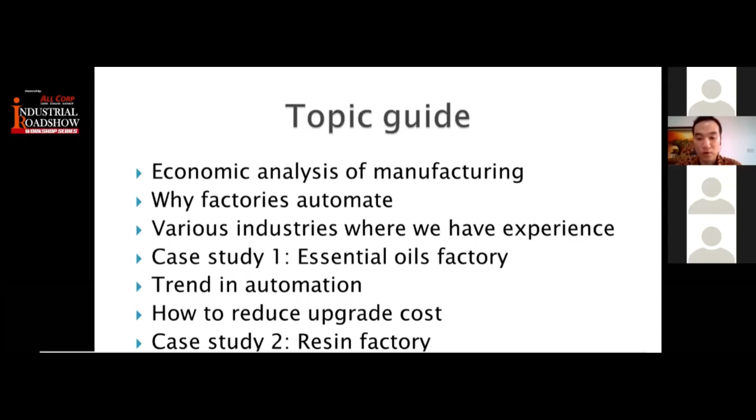As business owners, the main thing you actually want in the end is the net profit, right? It's a factor of three things: revenue, expenses, and finally the cost of production, which is COGS, cost of goods sold. The first part, revenue, is to do with how to sell more, so that's branding, product, and things like that. The second part is expenses, things such as electricity, rent, and other costs. And then finally is cost of goods sold, which is how much it costs to make your finished product.

That's a component of three things: labor cost, and cost of waste product—usually products that you already made but fail the QC, quality control process, so you cannot sell to the customer, and it becomes waste. The third component is productivity: how much your factory can make in one day or one shift. Now, these three things are usually the main reasons why a lot of factories automate, and this is the core of what we are trying to improve with our service.

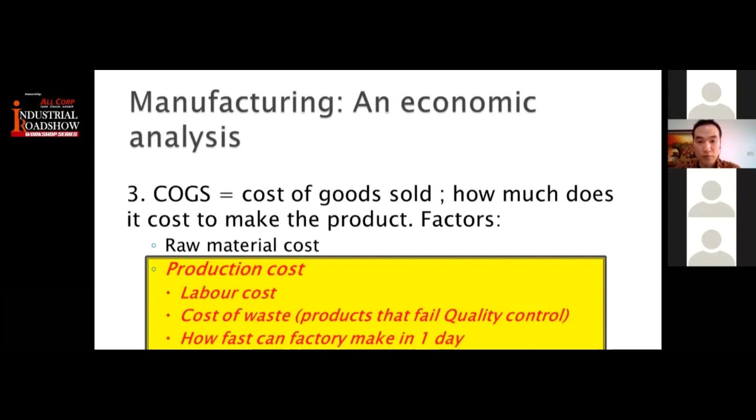So why do so many factories automate? You will see in developed economies there's usually more automation. In developing countries such as Indonesia and maybe Myanmar, the level of automation is less. But the reason why eventually most places automate is because, number one, your labor costs usually become more expensive over time. In Indonesia, labor costs each year usually go up 5, 10, 15% every year.

You still have to take into account things like health insurance and other costs. These things will make your production cost increase compared to automation, where it's usually initial capital expenditure, but after that it's very low maintenance and definitely does not go up in price every year. So the main reason companies automate is to reduce the labor costs required for manufacturing. Number two, which is less known, is you usually get improved product quality.

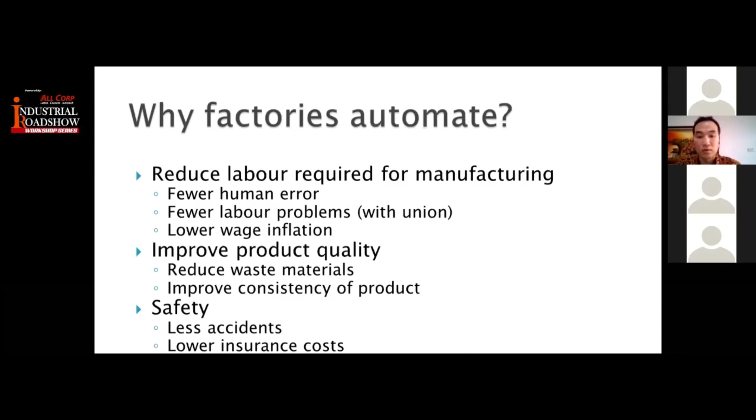The final reason is usually safety. We have had many customers who experienced accidents—sometimes a factory fire because a process went bad. Sometimes there are situations where the process wasn't monitored enough, or the local operator was distracted and did not monitor properly. This is a factor that can potentially cost a lot of money. So in summary, lower cost of goods sold will mean higher net profit.

Now, not all automation is the same. The process that we do is shown in the table on the left—we call it process automation, things like heating and cooling, batching, other industrial processes, mixing, and so on, compared to task automation. The main difference is that with the table on the right, you can already buy a complete machine, like a bottling machine or maybe a noodle maker.

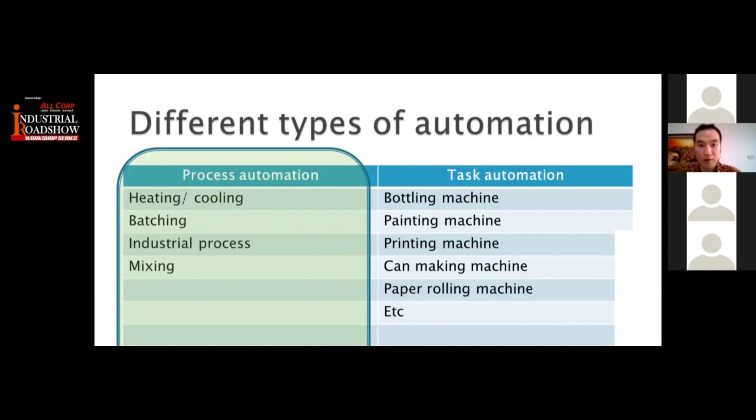You just put in the raw material and it comes out as the finished product—like a printing machine. These kinds of machines, we do not do; they are not our expertise. What we do is mostly a whole factory automation, and then we provide parts and components of that system. Now, can my factory become automatic?

Almost always the answer is yes, other than factories where you need special human skills, such as maybe a cup factory where you need to make the cup by hand, a handmade cup factory, or things like that. But most factories can, and most factories can always go to some percent of being automated.

Some of the main actions that can go automated are things like opening, closing valves, turning on or off pumps, agitators, blowers, or boiler machines, reading all sensors on the field - temperature, pressure, flow, level - things like that, as well as batching.

So batching is, I want to create 1,000 liters of product. That is called batching. It's very hard to do with manual labor, and it takes a lot longer per process.

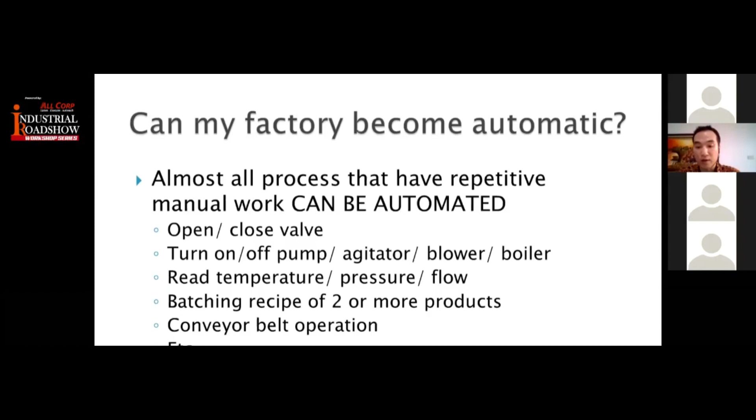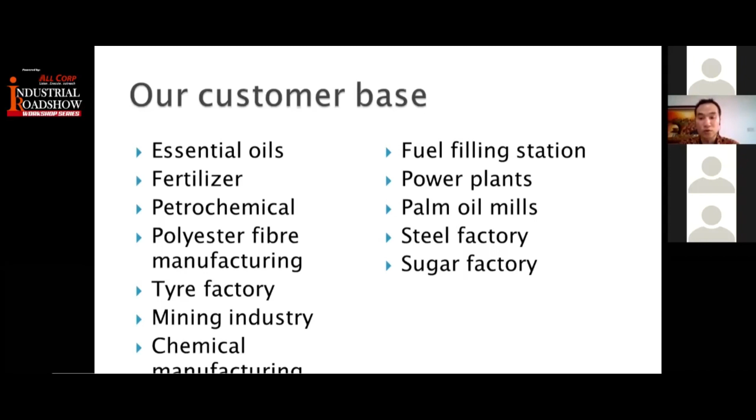Now, some of the factories that we have had experience in - if your factory is in some of these in this list, then you know that this is the trend worldwide. Things like essential oil, fertilizer, petrochemical, polyester fiber manufacturing, tires, mining industry, chemical. Chemical is a big one. I don't know what the industry of chemical is in Myanmar. Fuel filling stations, power plants, palm oil mills, steel and sugar factories. So if you have a factory along these industries, then you know for sure a lot of the process can be automated.

Okay, so we go to our first case study. We recently did this, probably about 1 year ago.

It's an essential oil factory. Essential oil is like getting usually the smell of a product, for example clove or cinnamon or coffee or vanilla, things like that. So they get the raw material, which is, for example, coffee beans, and then they want to get the chemical that has that smell.

So the key process that they automate is a process called fractional distillation. It's basically heating up the oil until it becomes gas. And then the gas is condensed and then it becomes a pure essential oil from that material.

So previously, we'll go through the process a little bit. The material is inserted into the tank and then mixed with water. In this way, the essential oil will go into the water, and then it is pressurized to a high pressure so that all of the oil from the material goes into the water.

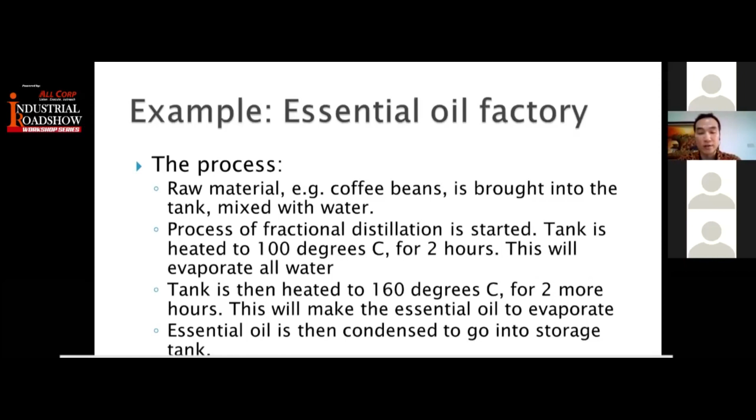So this process is not very complex, but it is high risk because you have high temperature, high pressure, and a lot of components need to be monitored for safety. So in the past, they had field operators manually open and close the steam for the temperature, things like opening, closing valves for the condenser tanks, and also monitoring the pressure and venting valves. So there's a lot of manpower involved.

So when we look at the study of the before and after, the initial headcount for their operation totaled 14 people. You have 7 operators for the production, the fractional distillation component, and then an extra 7 people for the utilities - the wastewater treatment plant, the boiler, as well as production manager and QC. So this is just on the plant floor.

So there's 14 people. Now, after the automation, what you get is a total of 6 people, because all those people who were opening and closing valves, monitoring pressure, monitoring temperature, can now just sit in the control room looking at the computer screen, and everything is controlled from the computer screen. So there's just 2 people on maintenance on the plant floor, 1 person in the control room, and then the rest is the same.

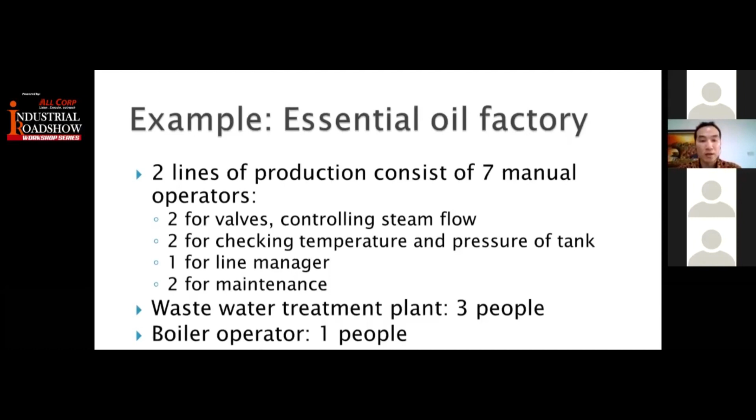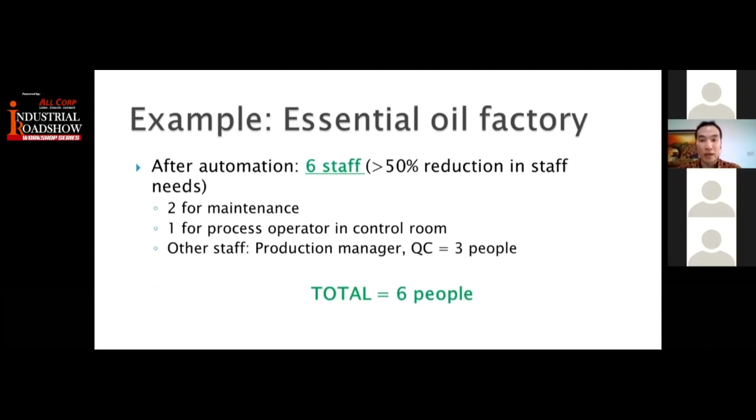So the production manager and QC is still the same. If you look at the previous slide, on the last line, production manager and QC is still 3 people. So that's not changed. But all the people doing the process on the floor is essentially reduced to 2 for maintenance and 1 for control room. So that's more than 50% reduction in labor staff requirement, right?

Now, some of the benefits this upgrade has brought to this factory. The first part is that you get production increase. How did this happen? Firstly, because the temperature is monitored instantly and then all controlled from one site, you can achieve the temperature a lot quicker. Maybe before it took them 1 hour to reach 100 degrees. Now they can get that in 30 minutes, right? And then you also can monitor the process a lot better. The end result is you get a lot more product from the same equipment.

Secondly, waste material is reduced by 20%. What happens with this waste material? In the past, because the process took a lot longer, you needed more diesel, more water, things like this. All of that is reduced because of automation.

Number three is better consistency in finished product. Previously you'd get bad product if the temperature was too high. In that case, the essential oil would be a little bit damaged because the temperature is too high. This means they had to throw away some products because it's too hot, and then the essential oil becomes bad.

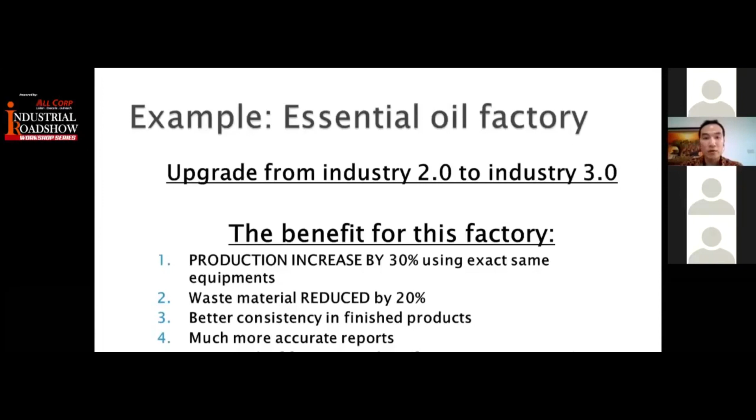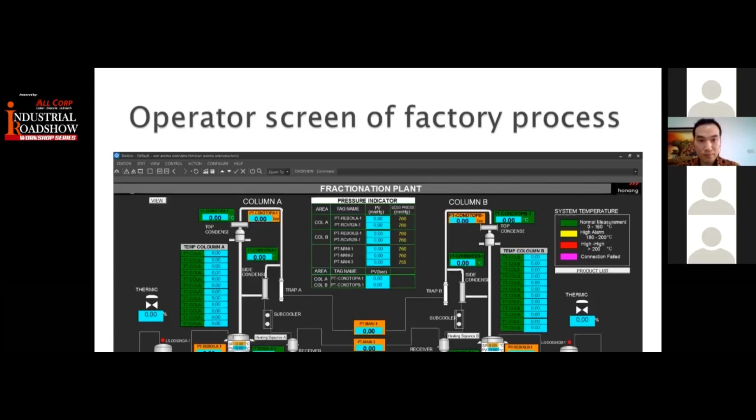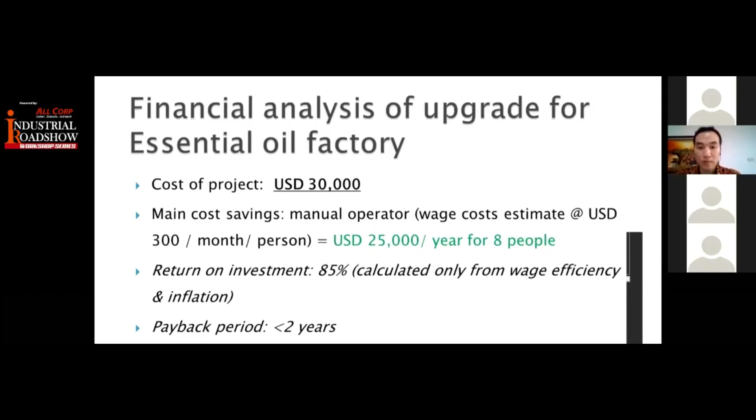So basically, with control system projects and automation, it's very flexible, meaning that you can start small and then add on to the project. That way you get a better return on investment every time you upgrade.

Now, a quick one on the trend in automation. We all hear a lot about Industry 4.0, but what most people misunderstand is what 4.0 means. Let me go through all the automation versions. Industry 1.0 is probably 250 years ago. Before that, they used to use manual labor like humans and cows. And then Industry 1.0 is an upgrade using steam equipment. After that, Industry 2.0 is using electricity.

Now, in Indonesia, it is now mostly already going into 3.0, where you have process automation. So the key in Industry 3.0 is automation, right? So you have things like control systems, PLC or DCS. These are quite industry-specific terms, right? And there's a lot less labor required. As you can see, you have more than 50% reduction in labor headcount once you apply automation. In some cases, it can be up to 70% reduction in labor requirement.

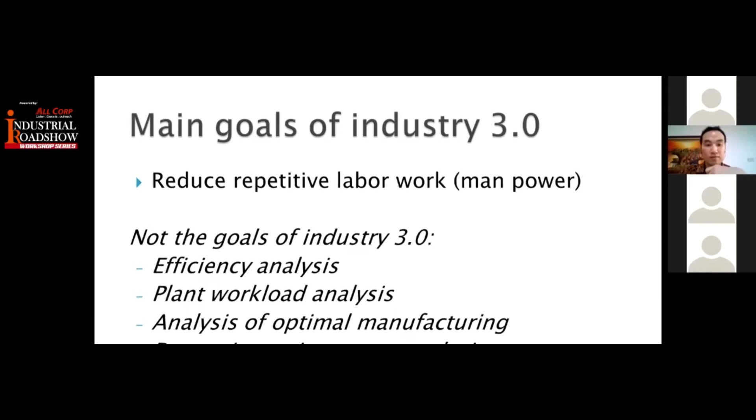So if I go to the next slide, you can see in 4.0 you have all these things like efficiency analysis, plant workload analysis, optimal manufacturing. For example, should I make material A first, or B first, or C first? And then the next one is preventive maintenance. So is my pump or motor almost at breaking point? Should I service it before it breaks down and shuts down my factory?

And then all these other analyses, like waste material analysis, were not possible before automatically. In the past, you would have to make a production report, a main material usage report, and then combine it into other systems like ERP and MES systems. But now in Industry 4.0, you can combine all of this data into the ERP systems in real time, and you get a much better analysis.

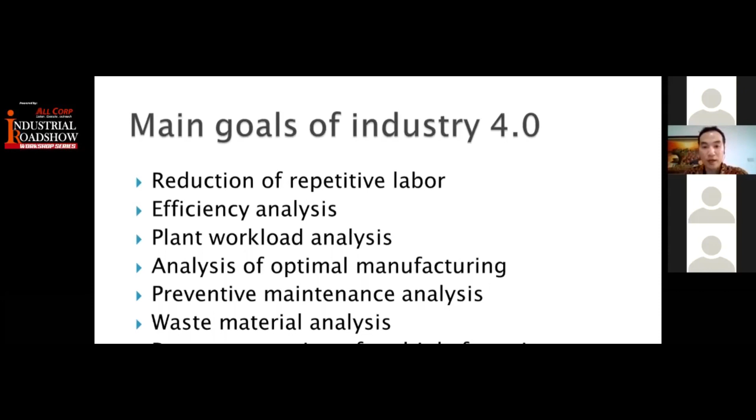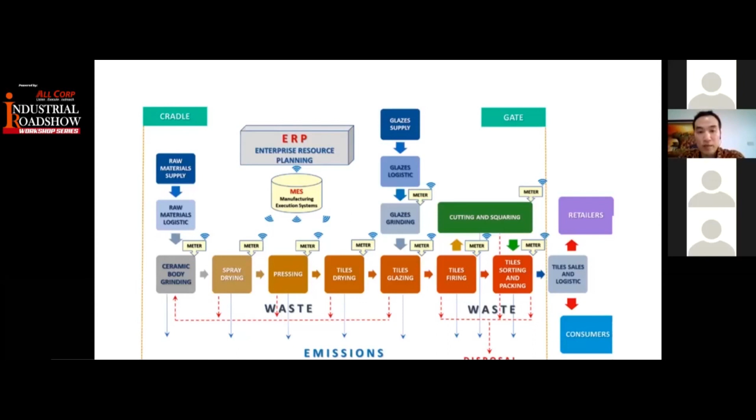Now, if we go to the next slide, I look at the reasons why a factory should or should not go to 4.0. The first point is that companies without ERP systems and MES systems - MES being a manufacturing execution system - if you do not have those systems in place, there isn't really much benefit from going to 4.0. It'd be good enough to just stay in 3.0.

Now, the majority of automation costs occur in upgrading from 2.0 to 3.0. The final thing I want to note is that going from 3.0 to 4.0 is very complex, because most integrators like my company only focus on the plant floor. But in 4.0, you need integrators who are very experienced with IT systems like ERP systems, like SAP for example. Most integrators who do automation do not have this expertise.

So if you're going from 3.0 to 4.0, you must know that it's a whole new level of integrator experience. A lot of projects have failed in Indonesia because the integrators are not yet experienced in these two different worlds. Most of the time, we do not need to know IT systems as an automation provider, but in 4.0 you really need to know IT systems, especially when working with third-party software like SAP or Oracle. This is not something that we or other integrators in the industry have had. So you must be careful when going to 4.0, because it's a whole new level of complexity.

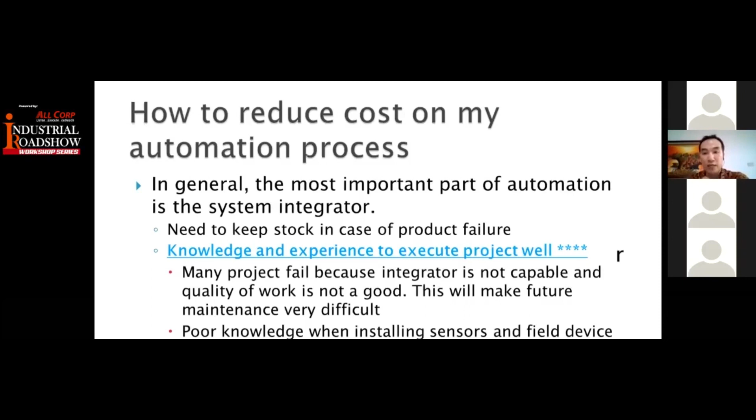That's the main thing, because as you know, when building a house, you can have really good materials, but if the person installing it is not competent, you can end up with a very bad house even though the material is good - the installation is the key part. So you want to find an integrator that has a lot of experience and a good support team, because each project is never good from the first day. It always needs improvement, so the integrator needs to have a good, experienced team.

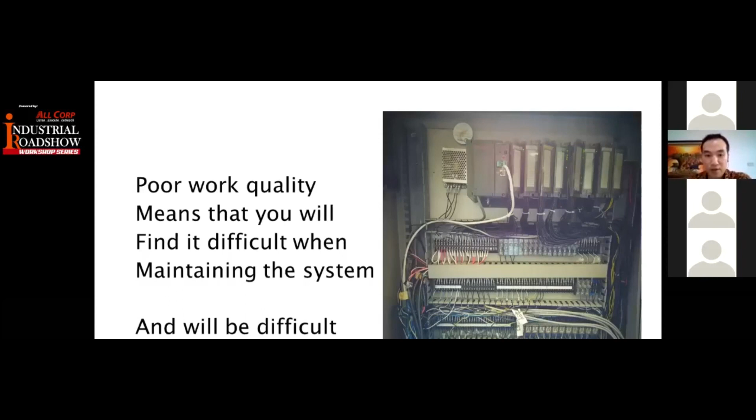Now, here's a photo of badly done work. As you can see, the cabling is not well done. A bad integrator can mean you'll have a very hard time upgrading your system, or if something goes wrong, it'll be very hard to find out where. As you can see here, it's a spaghetti situation - you don't know which one is wrong and where. So this is a bad job.

Now, the second most important part of automation is the control system.

The control system is the brain of the automation factory. The brain is the one that is on all the time and it works all the time. So in most cases, it's usually a PLC, or in a bigger factory, it's a DCS.

You want to go with brands that are reputable with a long track record. So we bring the brand of Honeywell, which is from USA, but usually the most common brands in this field are Japanese or European, mainly Germany, as well as USA. So you want something that has high reliability and it's a proven product.

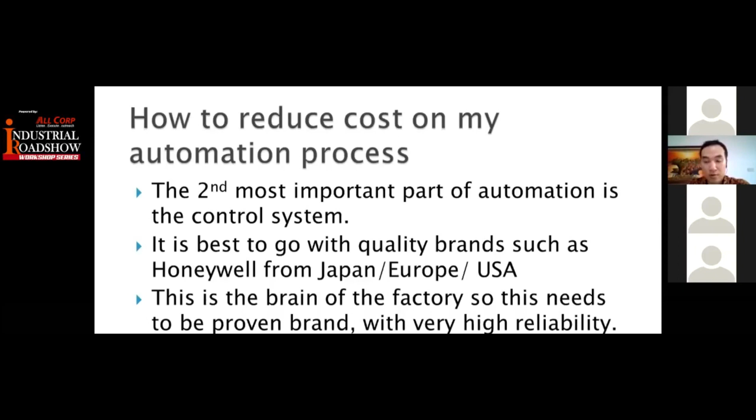Because if this component fails, your factory will not operate. So if it takes one day to fix, you will lose one day of production, and that is a lot of money. The price difference between a cheap brand and a good brand is very small, so it makes no sense to save money on something like that.

Now, the final part of the automation is the field device. So these are things like your pumps, valves, pressure sensor, temperature sensor. Now, this is the part where there are so many choices.

Usually, the best quality products are from USA, Germany, Japan. The middle quality is usually Korea, Taiwan brands. And then the lower price, where you have probably very, very cheap price, but also maybe the quality is not so good, is from China and India.

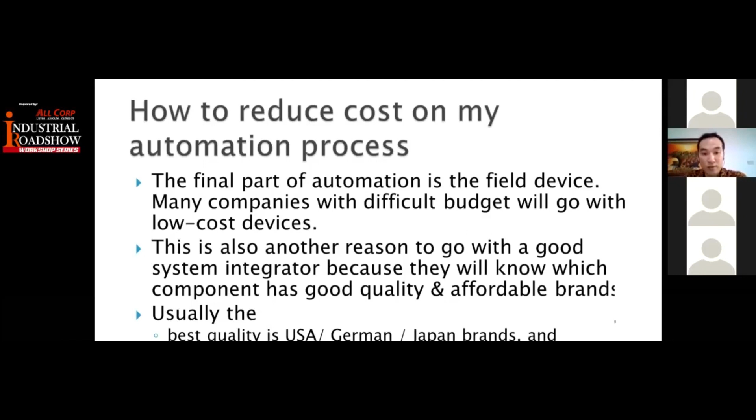So these two countries usually, for factories who are just trying out automation and they don't have a lot of budget, they usually start off with Chinese brand or Indian brand, and then as they see the benefit of automation and they have more cash flow, they will upgrade to the other brands above it.

Now, usually in most cases, this is the part where companies will try to reduce their budget, because even Chinese or Indian brands, they will still work. You may not get a long lifetime, but they will still work, and the accuracy depends on what you buy.

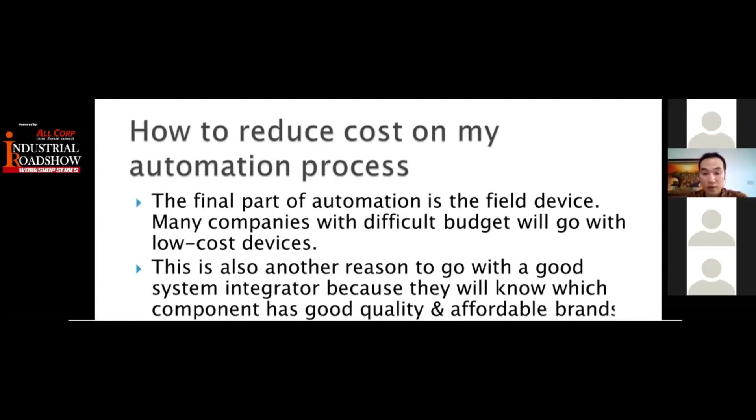Right now, here's the other part that we see a lot of companies use to reduce the capex, the capital expenditure cost of an upgrade. So one of the bigger cost benefits is to skip using a consultant or an EPC company.

We have worked with many companies who try to automate, and instead of hiring a consultant company or an EPC company, they hire an expert as the project leader. This project leader is essentially the person with the design and the knowledge.

Usually this project leader has worked in a factory that is already automated, so you can understand what the other companies have done, and then they will help you make your factory a lot better. This method is a lot cheaper than going with a consultant or an EPC company.

An EPC company is like the main contractor of a factory automation project. As a benefit, you get not only cost savings, but your team will also know your factory automation a lot better because they execute the project themselves. And then you can bring companies like my company to do the actual field products.

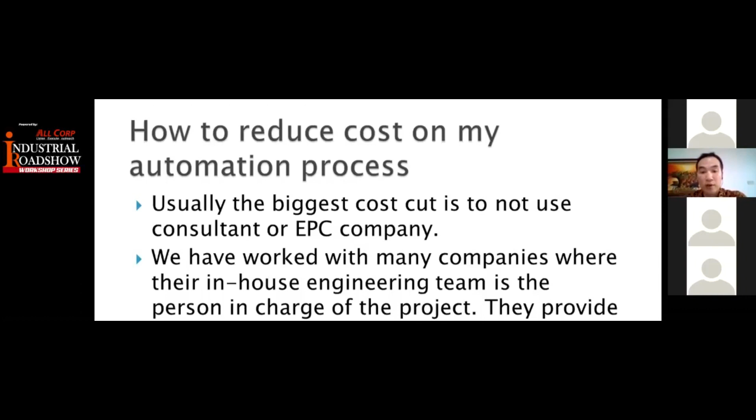Mistakes on these projects - number one is always the system integrator. A lot of system integrators, when you ask them at the beginning, do you know how to do this, they always say yes. But you really want somebody, if you get a reference or case study of what they've done, so you know that they actually know what they are doing.

The second part is usually the equipment that is chosen by the integrator who is not experienced. So things like materials that are not compatible, so you get corrosion or very short lifetime. Things like materials that are not rated for temperature and pressure of your factory, so it breaks down a lot quicker.

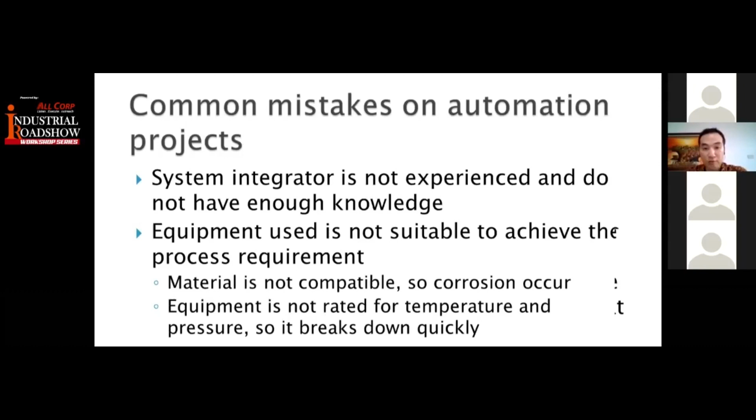Right, so we'll quickly finish up. This is the final case study - it's a resin plant. Same story: it used to be mostly a manual plant where they would mix. Resin is like adhesive that you use for furniture to make the wood stick. So if you look at low cost tables, it's actually wood chips - not solid wood, but wood chips - and then it's combined with resin to become a solid wooden material.

So it's a combination of 6 or 7 chemicals, such as formalin, water, nitric acid, and so on. You need to mix it according to customer request. The customer with the highest quality will ask for the most active agent like formalin, so it becomes more sticky. Whereas the cheaper customer cannot afford the expensive product, so they need to add more water, so it's cheaper.

So in this project, the main complexity is in batching and ratio control, because all of those things need to be mixed to the correct concentration.

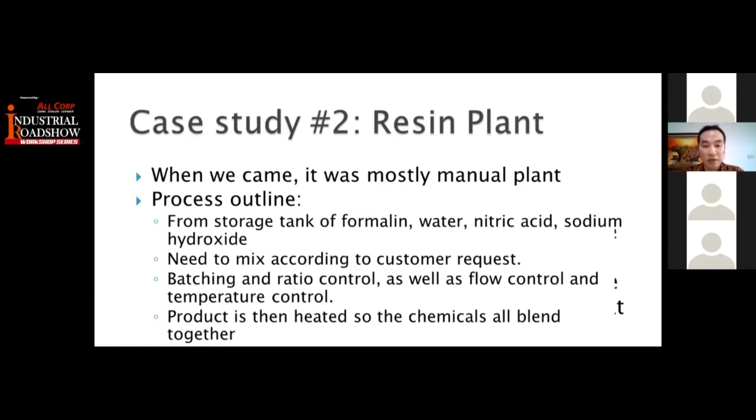Now, another component is that about 5 years ago, they had one big accident where the chemical pump was not turned off, but on the other side, the valve to the tank was already closed off. So you have this situation where the pump is still pumping, but the outlet is already closed. So you get a big pressure buildup, and then eventually the pipe burst. This caused all the chemicals to spill on the floor and cause a big problem, a factory shutdown, and many government fines.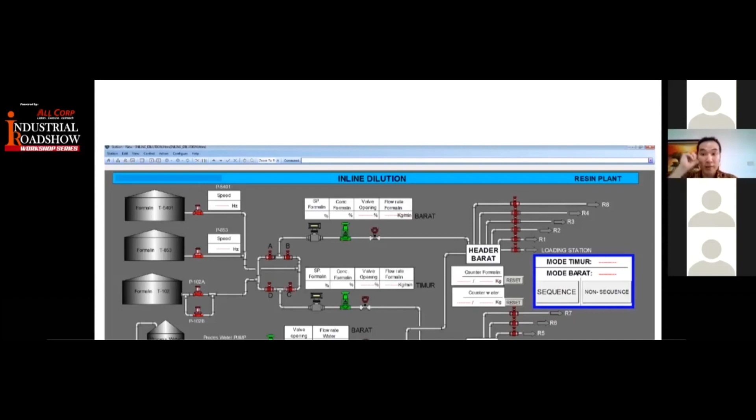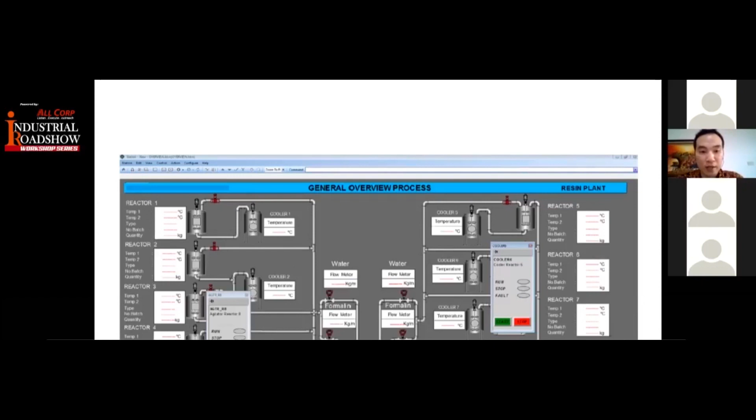Here's another part, which is the reactor. Once they are all mixed together, they need to be heated so that the combination works well and all the chemicals are mixed together. And then here's the final part, which is what is inside the heating reactor. So you get things like analysis, like the weight, temperature control. You have the pH analysis and things like that.

So all of this you monitor, and if you were to do it manually, this would be very complex, and you need a lot of people.

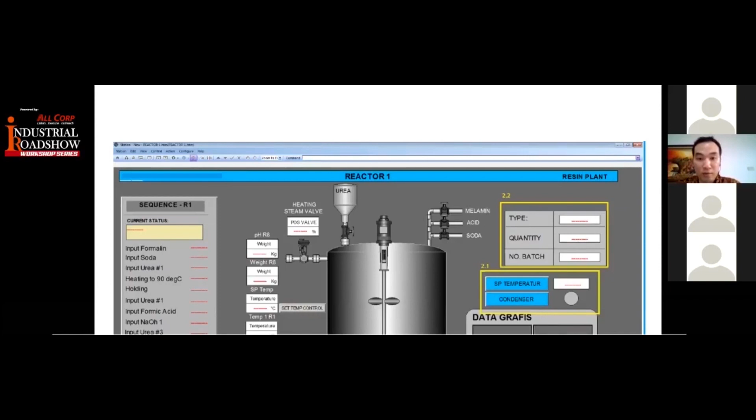Number two is better product quality. In the past, the recipe accuracy was probably around 80%, now it becomes 95%.

Number three, this is the part that is most beneficial, is the higher productivity. Before, every time they make a batch, they need to check with the lab to make sure the recipe is consistent. But usually, because it was manual, they find out that it's not enough of material A or not enough material B, and they need to redo the mixing again. Now, by doing automation, they don't have to do that anymore. You get a more than 50% improvement in productivity, because now when you make it, it finishes well and it's immediately good. So you don't need to redo the mixing again. This saves a lot of time, and they can make a lot more product without investing in more machines.

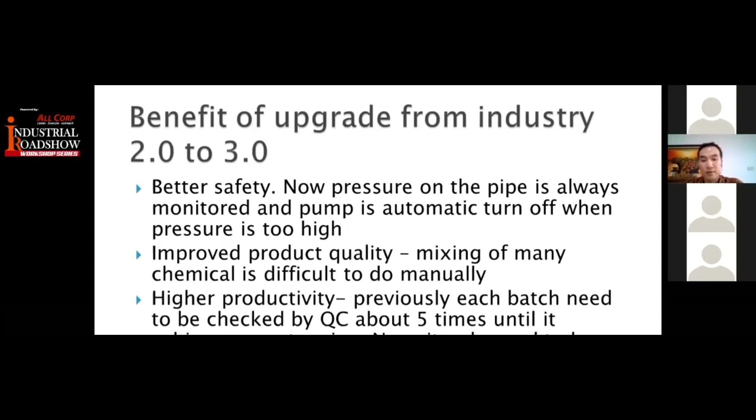Okay, that's the conclusion of my presentation. What to do next if you're a factory owner or a plant manager? The first thing is usually to analyze your process. Is it efficient? Do you think it can be better? Maybe look at your competitors or look at what they do in other countries. Usually you'll find that automation is a key component. Now, maybe you don't know what the next steps are.

If there are local suppliers, or maybe you can contact us for a consultation process. But the final thing I want to say is that you don't need to automate all of your factory in one go. You can start by automating maybe 10%, 20%, and then build up to more automation. You can do it gradually, no need to do it all in one go. Yeah, that's it.